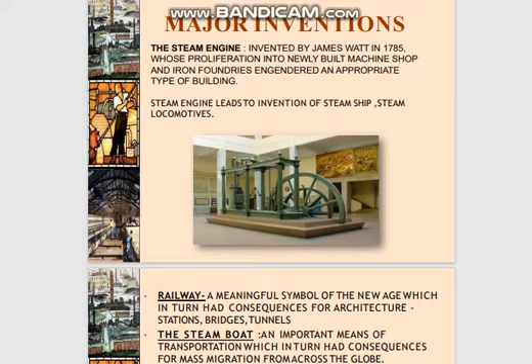Industrial Revolution. Why was it started? Why did the Industrial Revolution first start in England by the 18th, 19th? Some factors: population increase, major inventions, this one, development in transportation system.

Impact of Industrial Revolution on architecture. The Industrial Revolution transformed the way we think, work, and live forever. The Industrial Revolution, increasing production brought about by the use of machines, characterized by use of new energy sources.

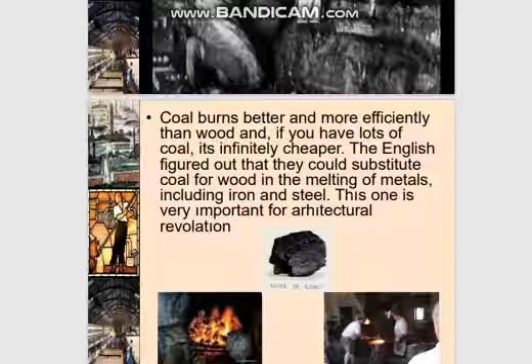Big changes in agricultural production, transport technology, and our main focus has been architecture. Architecture starts using the new industrial products, and architecture works made to influence the purpose of use and production. Oriented architecture was switched.

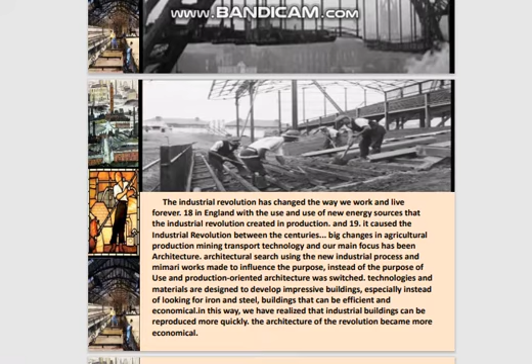Technologies and materials are designed to develop impressive buildings, especially iron and steel, buildings that can be efficient and economical. And this way, we have realized that industrial building can be reproduced more quickly. Architecture of the revolution became more economical.

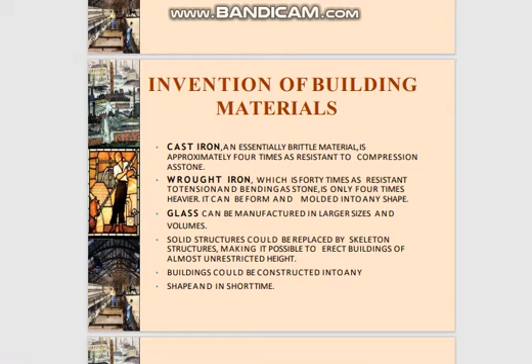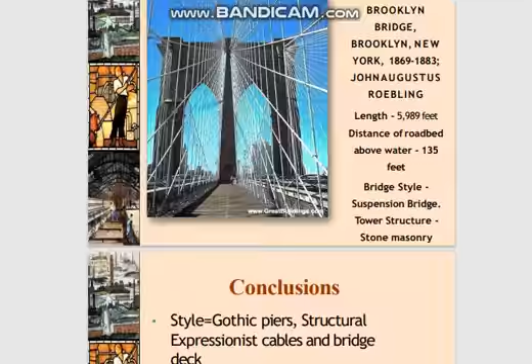Invention of building materials: cast iron, wrought iron, glass, steel. Actually, the most important example is Crystal Palace.

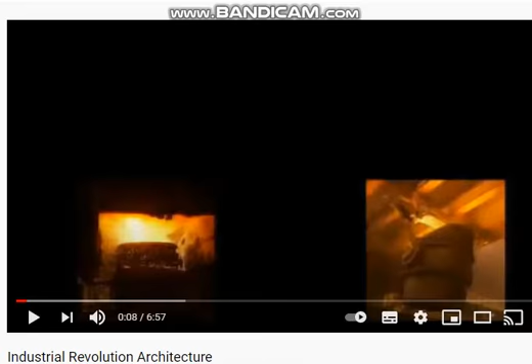The Industrial Revolution transformed the way we think, work, and live forever. The Industrial Revolution was an increase in production brought about by the use of machines, characterized by the use of new energy sources. It originated in Britain between the 18th and 19th century.

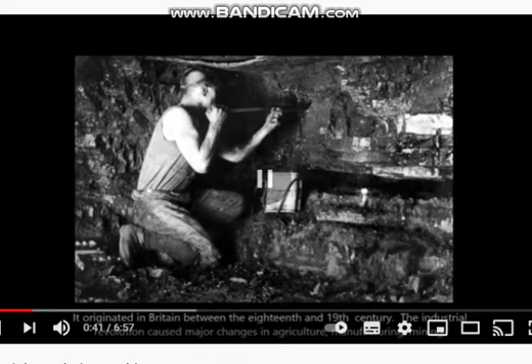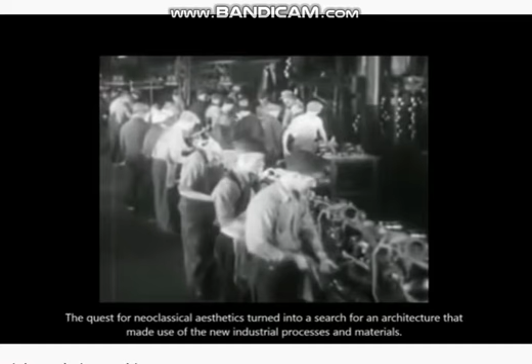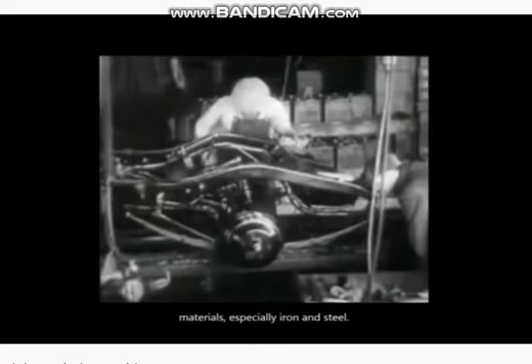The Industrial Revolution caused major changes in agriculture and our main focus, architecture. So how did the Industrial Revolution affect architecture? The quest for neoclassical aesthetics turned into a search for an architecture that made use of the new industrial process and materials. Rather than beautifully made buildings with intent to impress, buildings were developed with the possibilities granted by new technologies and materials, especially iron and steel.

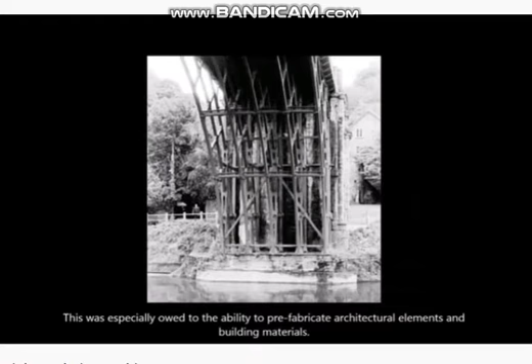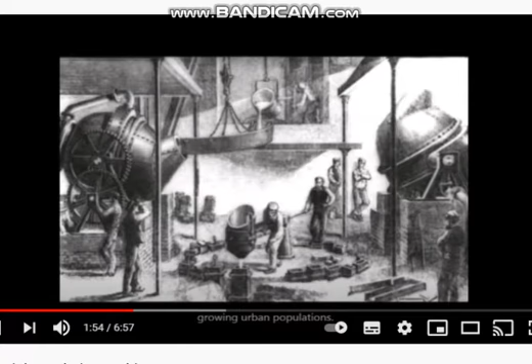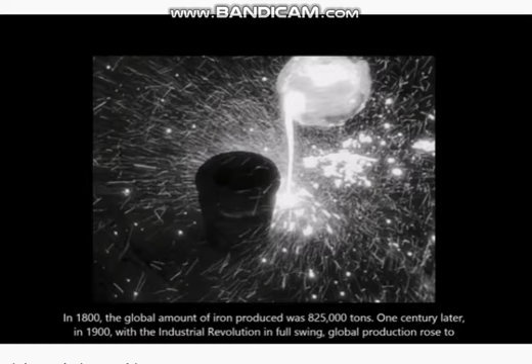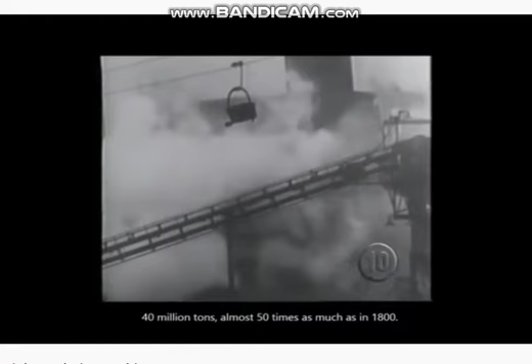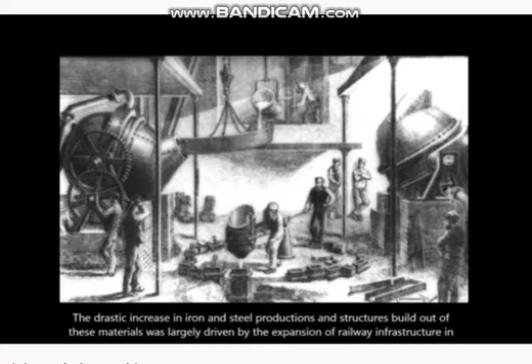In 1800, the global amount of iron produced was 825,000 tons. One century later, in 1900, with the Industrial Revolution in full swing, the global production rose to 40 million tons, almost 50 times as much as in 1800. The drastic increase in iron and steel production and structures built out of these materials was largely driven by the expansion of railway infrastructure in England and other parts of Europe.

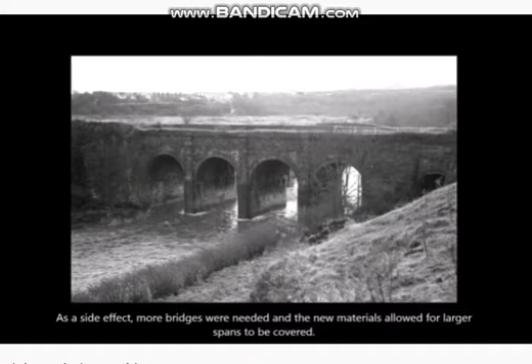As a side effect, more bridges were needed and the new materials allowed for larger spans to be covered. This early ironworks bridge was not like later iron bridges, but was rather more the direct translation of a stone arch bridge into one made of metal.

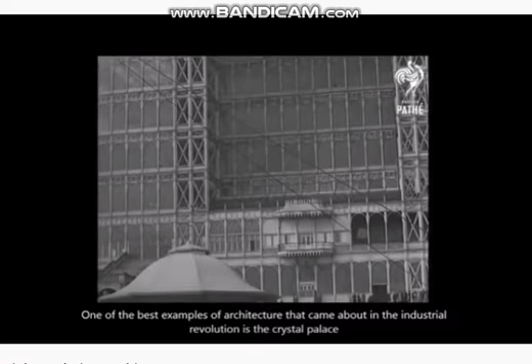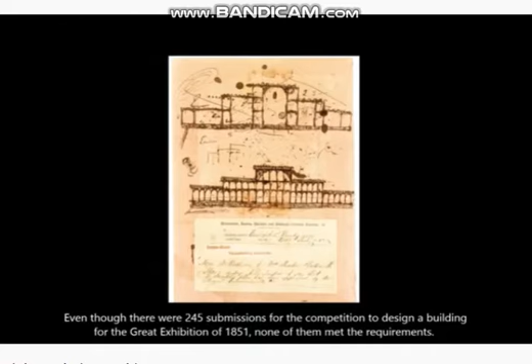One of the best examples of the architecture that came about in the Industrial Revolution is the Crystal Palace in England. The Crystal Palace was not designed by an architect but by a gardener, Joseph Paxton. Even though there were 245 submissions for the competition to design a building for the Great Exhibition of 1851, none of them met the requirements. This gave Paxton the opportunity to present his idea.

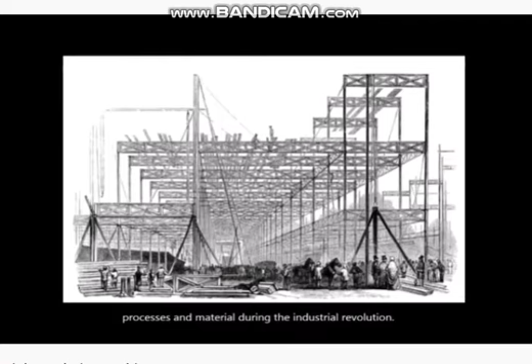His design became known by the nickname Crystal Palace and was a direct result of the possibilities granted by the technological advancements in building processes and material during the Industrial Revolution. The structure was prefabricated, assembled on-site, and utilized large quantities of iron and glass, which is in a way similar to many modern buildings too.

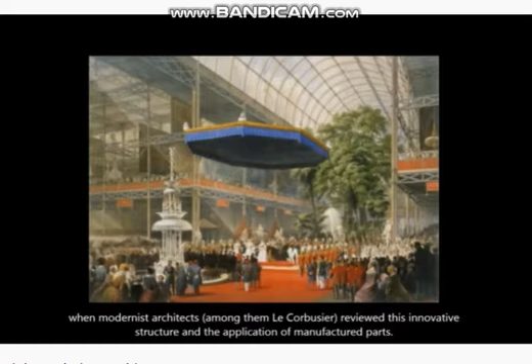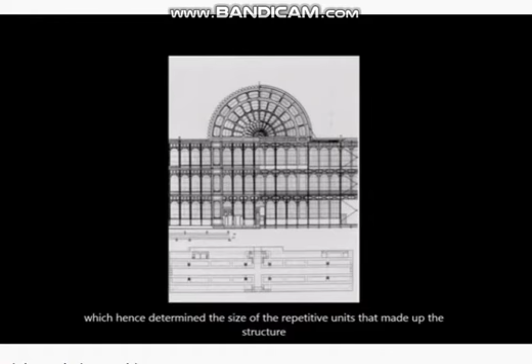The exhibition was considered successful, but Paxton and the Crystal Palace did not find much praise until the 20th century, when modernist architects, and among them architects like Le Corbusier, reviewed this innovative structure and the application of manufactured parts. August 1850 saw the groundbreaking for the Crystal Palace. For the entire structure, only one size of glass was chosen, which hence determined the size of the repetitive units that made up this structure.

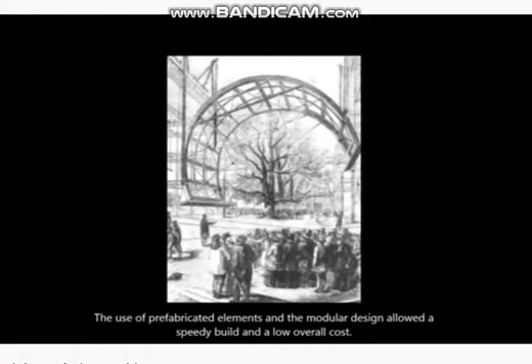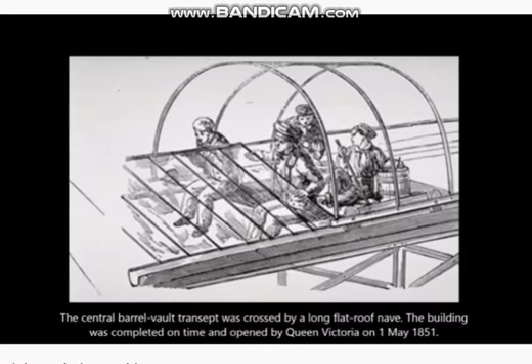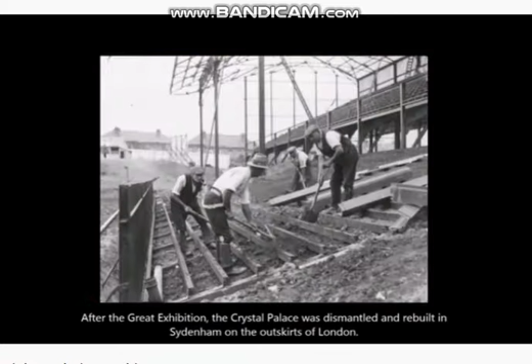The use of prefabricated elements and the modular design allowed the speedy build and the low overall cost. 19 acres of the Hyde Park in London were covered by the structure in a little under 9 months of build time. The central barrel-vault transept was crossed by a long flat roof nave, and the building was completed on time and opened by Queen Victoria on 1st of May 1851. After the Great Exhibition, the Crystal Palace was dismantled and rebuilt in Sydenham on the outskirts of London.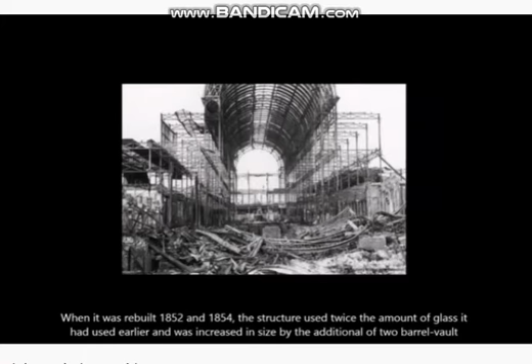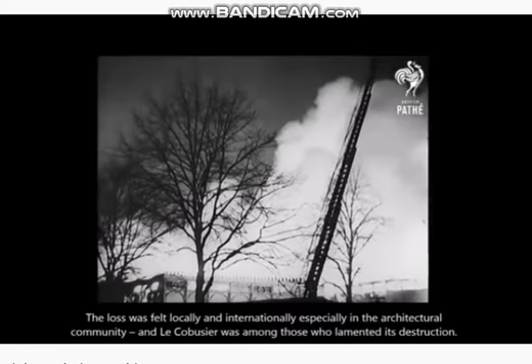But the Crystal Palace was not just a relocated building. When it was rebuilt in 1852 and 1854, the structure used twice the amount of glass it had used earlier and was increased in size by the addition of 2 barrel-vault transepts at the end of the original nave. The Crystal Palace remained an attraction until 1936, when it unfortunately burned down in a disastrous fire. The loss was felt locally and internationally, especially in the architectural community, and Le Corbusier was one among those who lamented its destruction.

Today, there are no visible signs left of the Crystal Palace. However, London could soon see the return of this landmark, since in October 2013, a Chinese company announced its project.

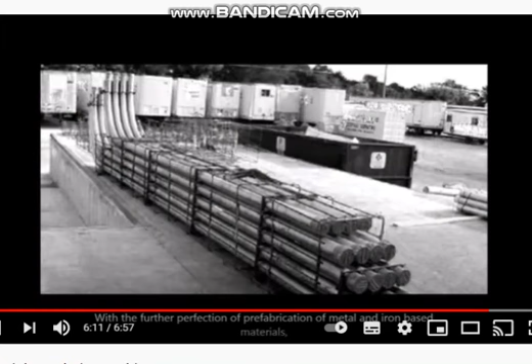The technological advancements and building materials that came about during the Industrial Revolution laid the foundation for the modern architecture of the early 20th century, and are the basis even of high-rise and skyscraper construction of today. With the further perfection of prefabrication of metal and iron-based materials, our generation has been able to enjoy further improvements of efficiency and costs related to construction and architecture.